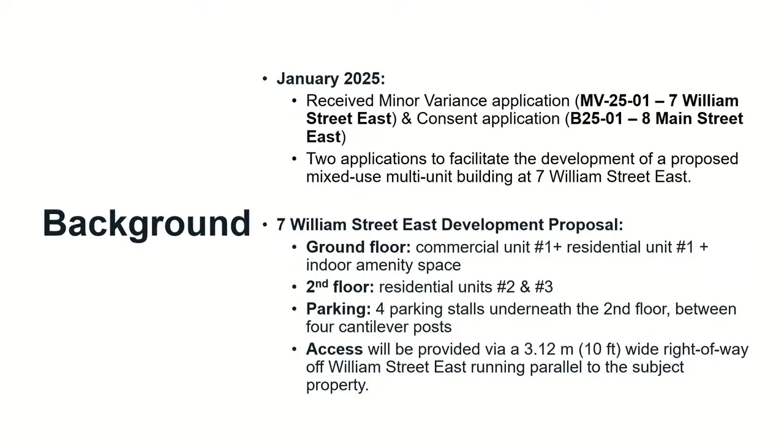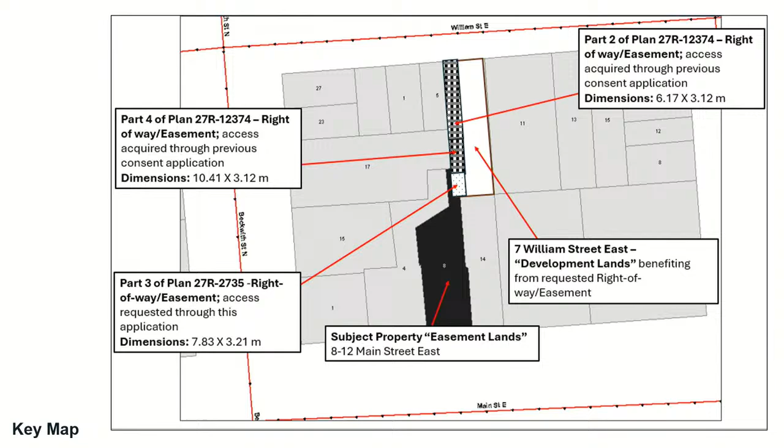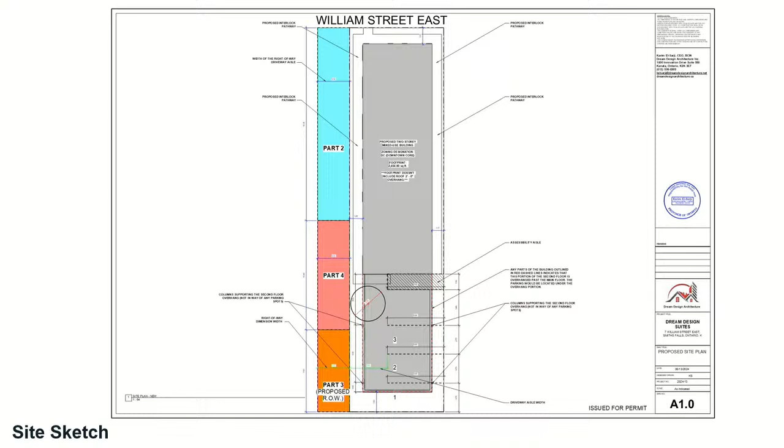On the site sketch provided by the applicants, it's a little bit clearer to see the right-of-way that is being requested, shown in orange, in relationship to the development lot at 7 William Street East. So the requested right-of-way is actually the orange piece at the rear, just for context.

Looking at the architectural drawings, in the front we can see the proposed commercial unit, and the residential unit would be in the rear. The interior amenity space, which is 4.18 square meters in area, is at the back. So we have the commercial in the front, residential in the middle, and interior amenity space in the back, and beyond the amenity space would be the parking stall.

So this is just the ground floor.

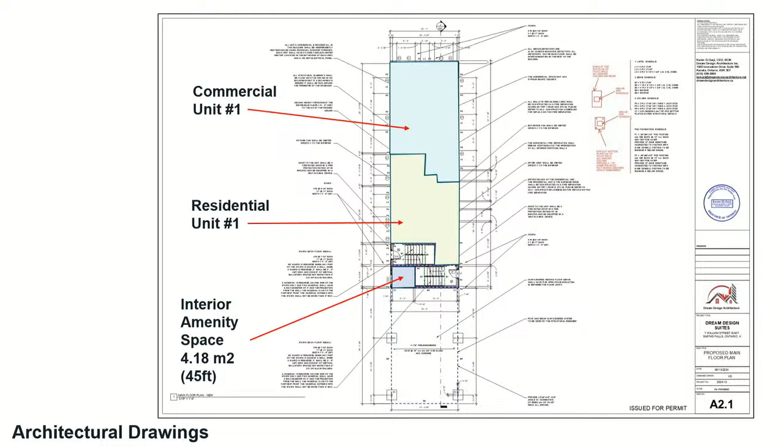Now we're looking at the elevation. This would be the front and the side elevation of the proposed multi-unit dwelling. And then we're looking at the rear and the side, the back end of the property. If you're looking at those sticks at the end, those would be the cantilever posts where the proposed parking will be.

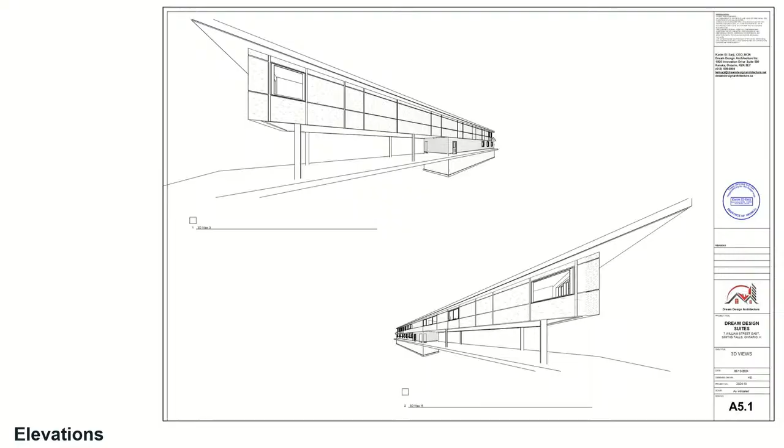As discussed earlier, the purpose of consent application B2501 is to secure legal access from 8 Main Street East via a right-of-way. The right-of-way measures 7.83 by 3.21 meters. The requested right-of-way will provide space to create a functional driving aisle measuring 6.7 meters, allowing access to the parking lot at the rear of the proposed development at 7 William Street East.

Looking at the application history for 7 William Street East, in 2022 applicants requested an easement, B22. Through application B2203, applicants requested to create a development lot called 7 William Street East. Part of the conditions is that if they were able to create the freehold lot, they would also need to have a development agreement in addition to developing the lot.

Looking at the other applications, there's B2204, which created an easement that benefited 7 William Street East, and application B2205, which also created an easement that benefited 7 William Street East.

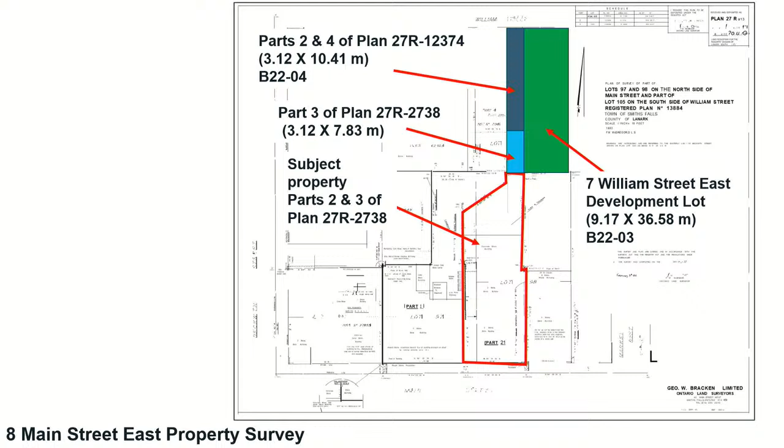It's a little bit clearer on the property survey. In green, we have the development lot that will be created as a condition of this consent process. Looking at the blue, we see parts 2 and 4 — that easement was created through application B2204, and part 3, the blue, is what is being requested through application B2501, the application today. In red, we see the subject property, which is 8 Main, requesting that access be provided from the subject property here.

As part of the process, consultation is an integral part of the planning process. We received feedback from the Department of Public Works, the Chief Building Official, and Hydro One Networks. With respect to the building official, he had no objections to this proposal and no comments at this time. With respect to Public Works, they did not object to this proposal, but recommended that parking suitability be confirmed by a P.Eng. or transportation consultant.

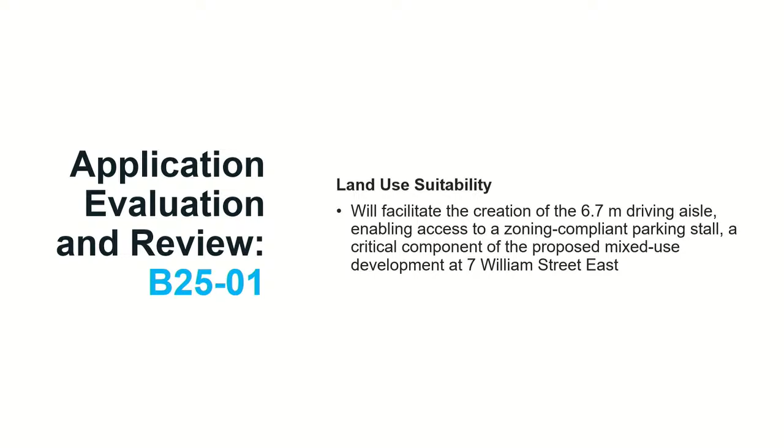In terms of land use suitability, staff are of the opinion that the requested right-of-way creates a functional driving aisle, enabling a zoning compliant parking stall, which is critical to the development of the proposed lot at 7 William Street East. Staff are of the opinion that application 2501 broadly meets the intent of the PPS, the official plan, and should be given favorable consideration by the committee, subject to the conditions outlined.

Thank you, Richard. We will begin by hearing from the applicants for any additional information or presentation as it relates to the consent application. Hi there, my name is Krista Lindman. I'm a lawyer, agent for the applicant.

I think Richard's presentation covered everything very well. One thing I did want to clarify is that the right-of-way will only be accessed from William Street. We won't be coming in from Main Street. It's just tacked on to the back of the previous two rights of way that were granted from William Street. Otherwise, I think Richard covered everything very well, and I do think it meets the criteria under the Planning Act, and would be very happy if you would grant the consent today.

Thank you. If you have any questions. Questions? Okay. Thank you, thank you.

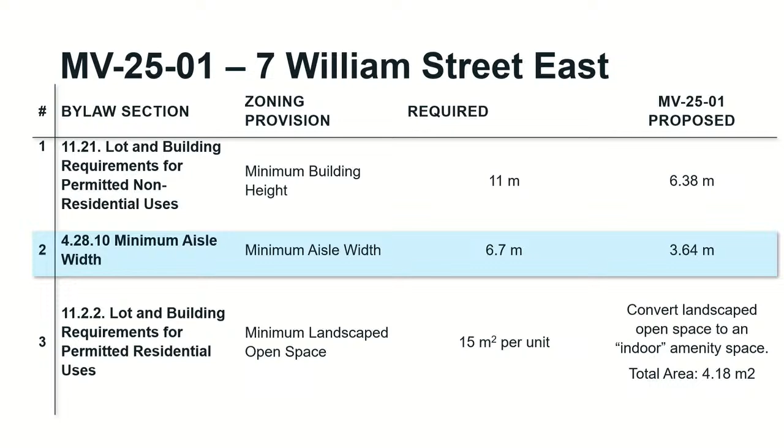As part of the minor variance process, they have to meet the 4 tests for the committee to grant a variance. Looking at the zoning bylaw, for request number 1, which would be a reduction in the minimum building height from 11 meters to 6.8, staff consider the request to conform with the zoning bylaw because it demonstrates a reasonable sense of scale and maintains neighborhood character. Essentially, all the streets on Main Street and William Street East are roughly 2 stories or lower, so this proposed building being 2 stories does not alter the existing character.

Hydro One recommends that the proposed building either maintain a height of 3.17 to avoid the overhang, or relocate the pole that is at the back of the lot. So that is something they have to contend with if they're going to get their requested relief.

For request number 2, looking at the minimum driving aisle width to be 3.64, staff are of the opinion that if conditional approval is granted for application B25-01, then legal access will be provided, and all that we have now is a physical space to maintain. So staff would consider that this request conforms.

Looking at request number 3, to reduce the proposed indoor amenity space from 15 meters squared to 4.18, staff do not think that this represents a functional interpretation of an indoor amenity space and propose a modification to a size of 10 meters squared on the basis that it allows for sufficient interaction.

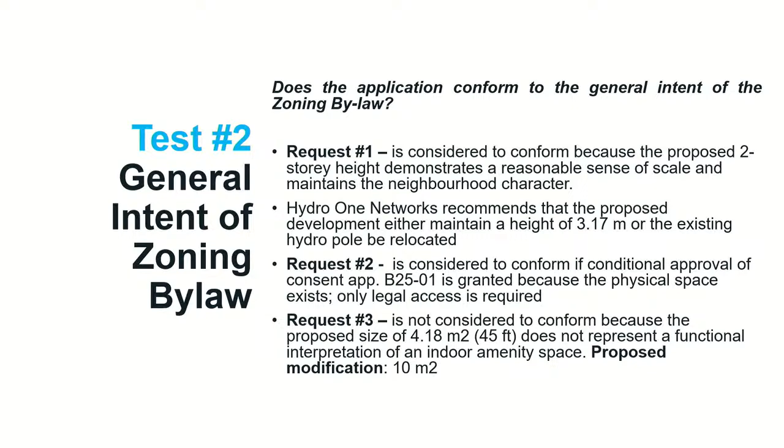Looking at whether it's desirable: for request number 1, staff consider it desirable because it conforms to the prevailing neighborhood character, being 2 stories in height. For request number 2, the minimum driving aisle allows for a functional right-of-way so long as conditional approval is granted. For request number 3, we consider it not desirable because it is too small to be functional.

Looking at test number 4, whether it's minor in nature: staff consider request number 1 to be minor because the established character has not changed. For request number 2, it's minor because physical space exists and this is just a process of providing legal access. For request number 3, we consider the proposed space too small, and as such it has more of a major impact, so it's not minor. Hence the recommendation for 10 meters squared for interior amenity space.

So here would be the summary of our recommendations: approving the recommended height of 6.38, recommending that the driving aisle of 3.64 be approved, and that the requested interior amenity space of 4.18 be increased to 10 meters.

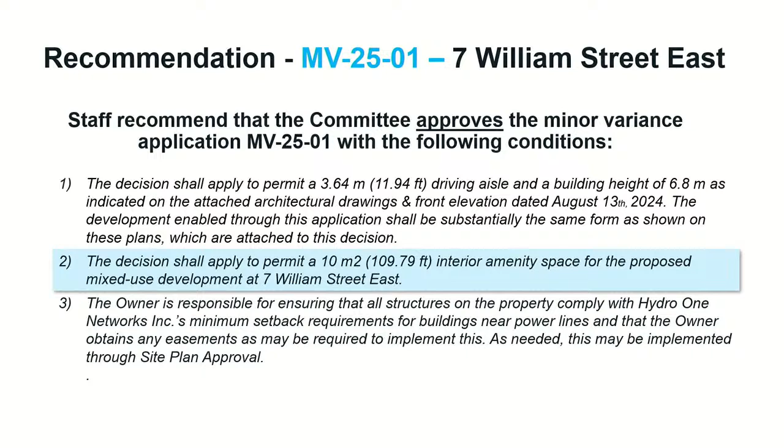There we go. So the staff recommendation is to permit the requested driving aisle and the requested building height, and to modify the amenity space to 10 meters, and that they comply with Hydro One's requirements for either relocating or reducing the height of the building, and that they also adhere to the downtown core design guidelines and get a grading and drainage plan and all the typical things required for a site plan, as well as a survey, and that consent applications B25-01 and B22-03 get final approval.

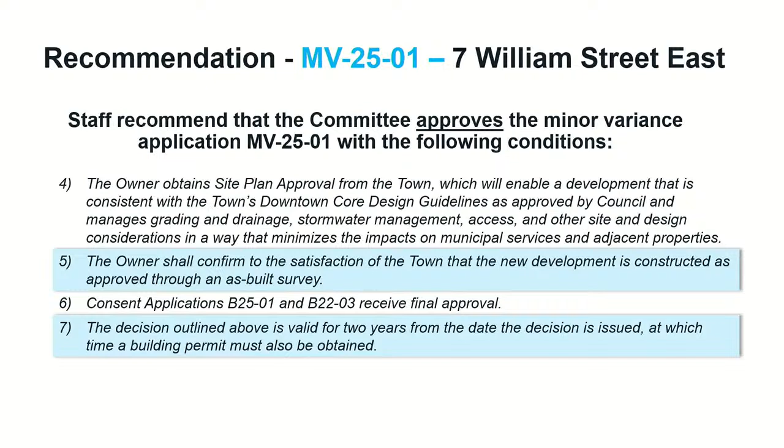Functional access to the parking stall, to the parking area. So is functional access to the parking area satisfied to the satisfaction of the town? The owner shall obtain site plan approval from the town, which will enable a development consistent with the town's downtown core design guidelines as approved by council, and manages grading and drainage, stormwater management, functional access to the parking area, and other site and design considerations in a way that minimizes the impact on municipal services and adjacent properties, to the satisfaction of the town. Does that make sense?

Okay, and then we're looking at condition number 3 about the interior space, for combined interior and amenity space.

Okay, so the decision shall apply to permit a combined interior amenity space and open livable space for a maximum area of 10 meters squared for the proposed mixed-use development at 7 William Street East. Does that make sense to anyone? Okay.